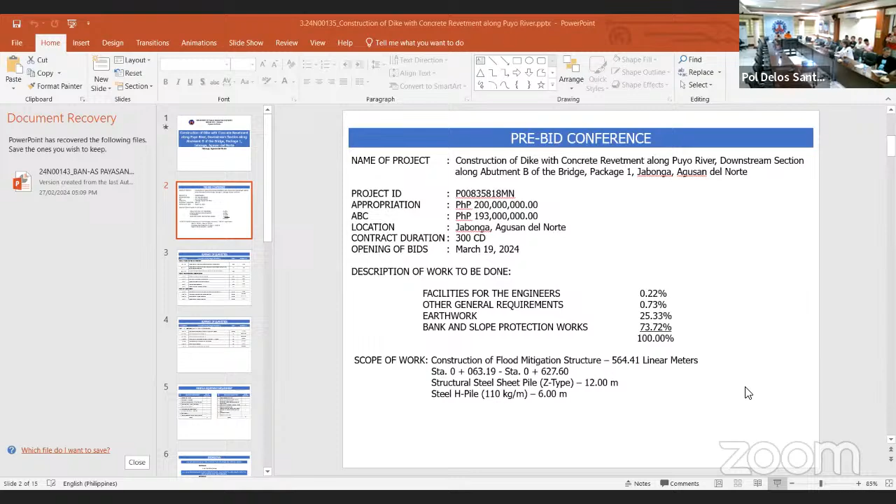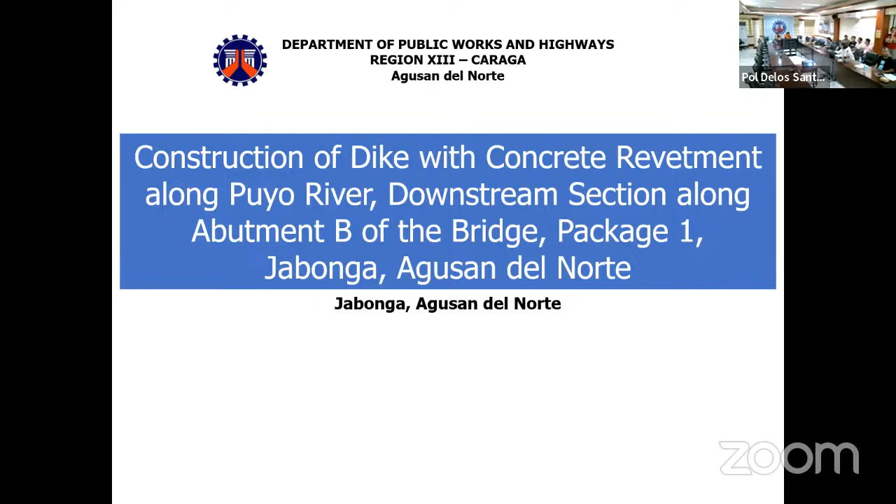So, contract ID 24N00135, construction of dike with concrete revetment along Puyo River, downstream section along abutment B of the bridge, package 1, Jabonga, Agusan del Norte. Project ID P00835818MN, appropriation 200 million, ABC 193 million, location Jabonga, Agusan del Norte, contract duration 300 calendar days, opening of

Bids March 19, 2024. Description of works to be done: facilities for the engineers 0.22%, other general requirements 0.73%, earthworks 25.33%, bank and slope protection work 73.72%, total of 100%. Scope of works: construction of flood mitigation structure with a length of 564.41 linear meters, stationing

Station 0 plus 63.19 to station 0 plus 627.6, structural steel sheet pile Z-type 12 meters, steel H pile 110 kilogram per meter with a length of 6 meters.

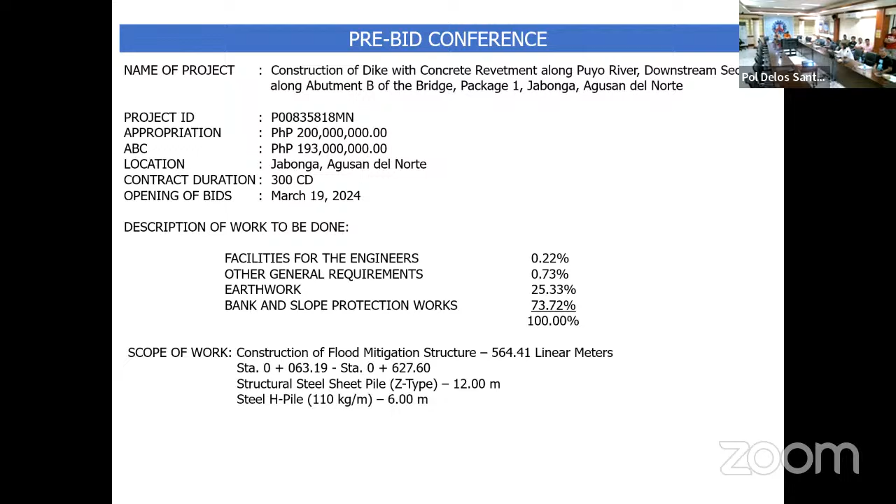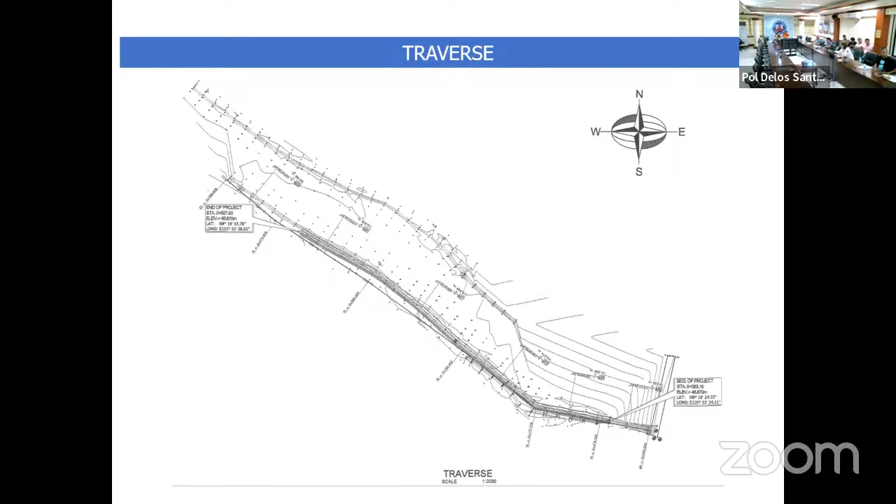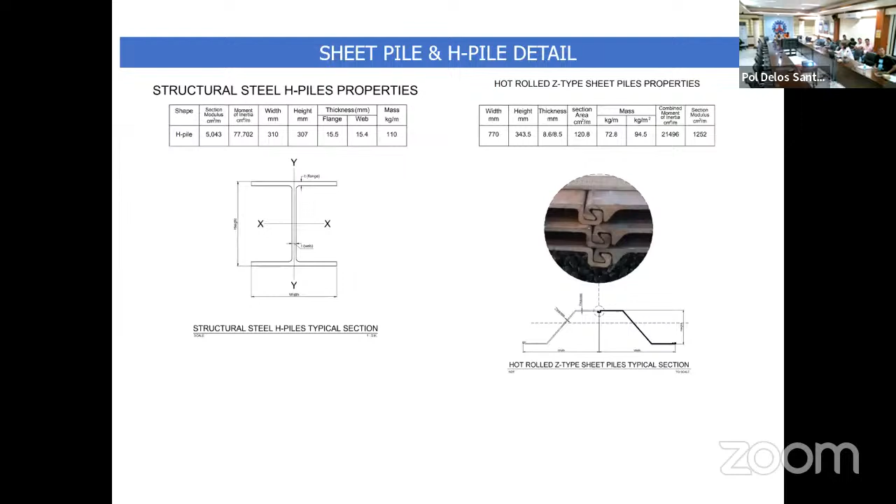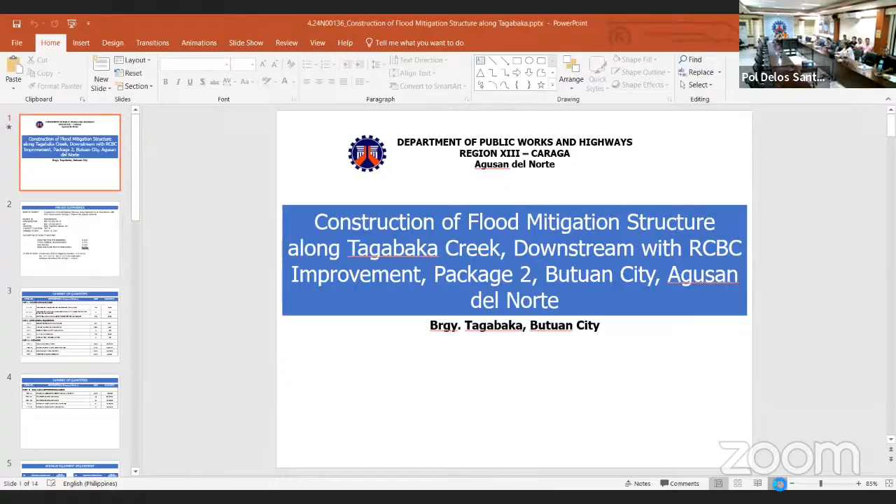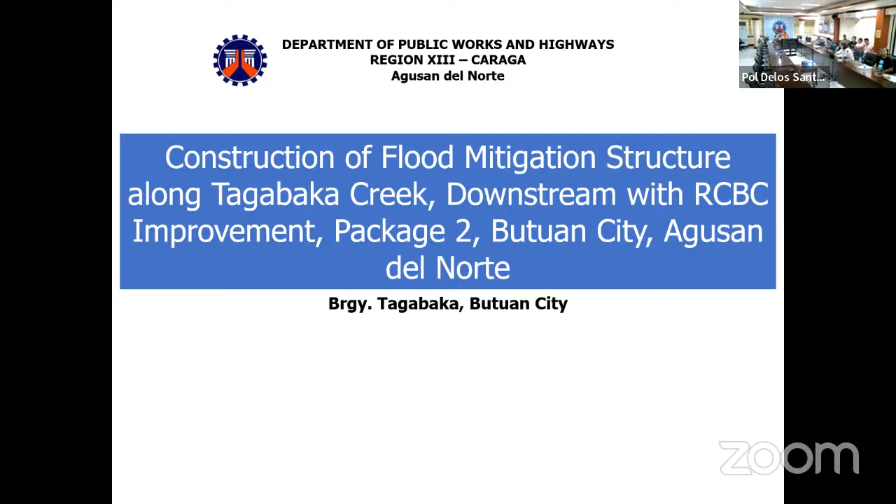For contract ID 24N00136, construction of flood mitigation structure along Tagabaka Creek downstream with RCBC improvement, package 2, Butuan City, Agusan del Norte. Project ID P00835848MN, appropriation 200 million, ABC 193 million, location Barangay Tagabaka, Butuan City, contract duration 300 calendar days, opening of bids

March 19, 2024, description of works to be done, facilities for the engineers 0.22%, other general requirements 0.72%, earthworks 9.16%, bank and slope protection works 89.9%, with a total of 100%.

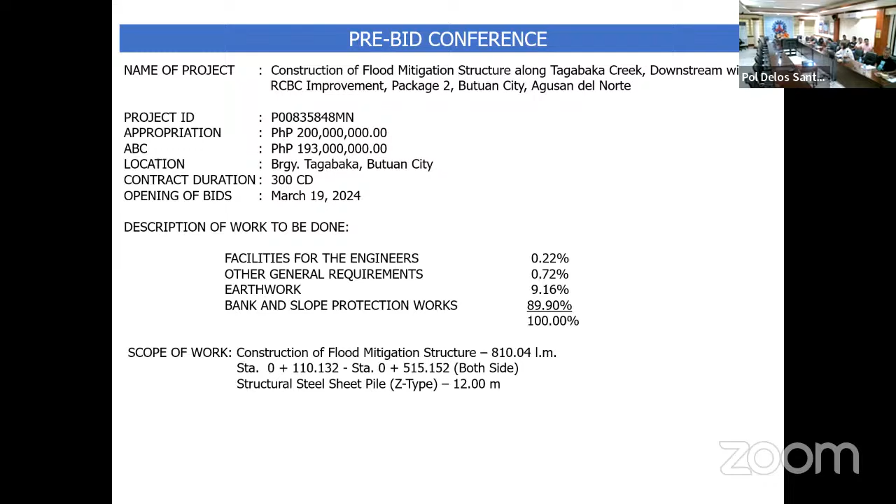Scope of works, construction of flood mitigation structure, length of 810.04 linear meters. Stationing, station 0 plus 110.132 to station 0 plus 515.152, both sides. Structural steel sheet pile Z-type with length of 12 meters.

Summary of quantities for Part A, facilities for the engineers. Part B, other general requirements. Part LA, earthworks. Part LB, bank and slope protection works.

Minimum equipment requirement. For the breakdown of item 8.1.18, item 8.1.111, item 8.1.116, item B.5 and B.72.

For the quarry site, item 104 and 200 at Aupagan Mountain, free haul. Item 200 at Taguibo River with an average hauling distance of 17 kilometers from project site. Item 311 and 405 at Cabadbaran River Dinabucan section, average hauling distance of 36 kilometers from project site.

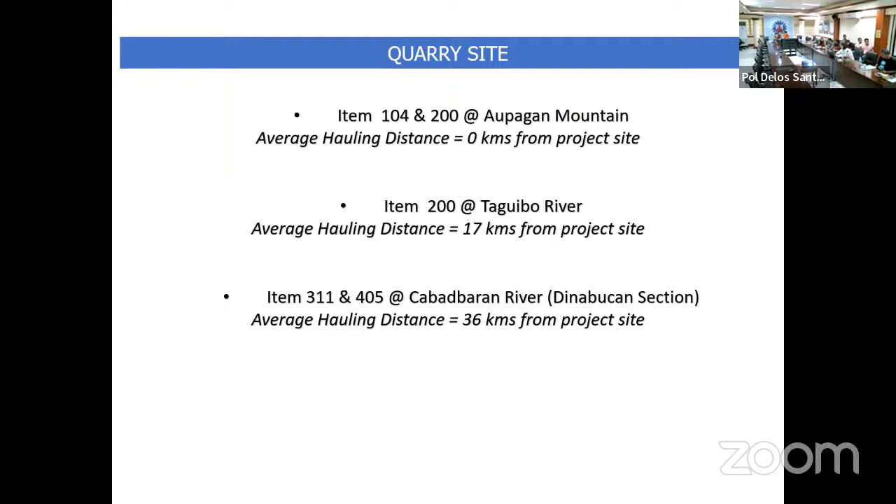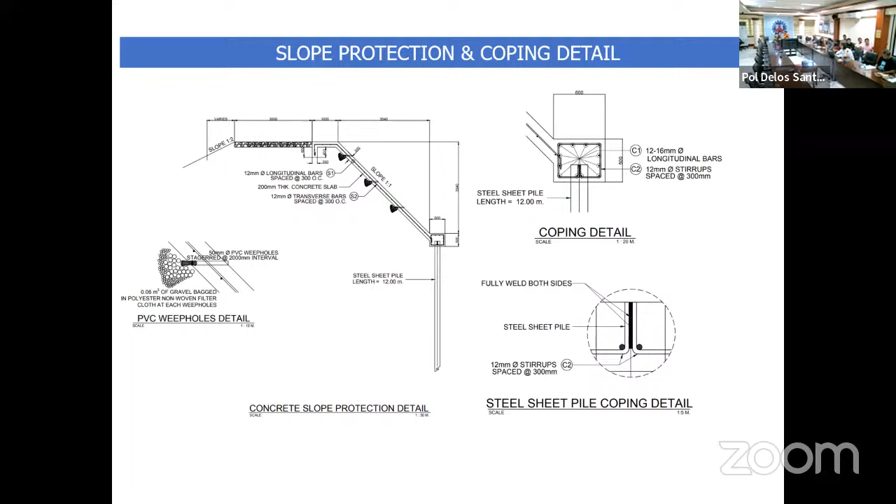For the location map, typical cross-section, slope protection and coping detail, structural steel sheet pile detail. That would be all. Thank you.

Next project with contract ID 24N00137, construction of flood control structure along Cabadbaran River upstream, package 3, Cabadbaran, Agusan del Norte. Project ID P00835844MN. Appropriation 200 million, ABC 193 million.

Location Cabadbaran, Agusan del Norte with contract duration 300 calendar days. Opening of bids March 19, 2024. Description of works to be done: facilities for the engineers 0.22%, other general requirements 0.87%, earthworks 14.33%, and bank and slope protection works 84.58%, total of 100%.

Scope of works: construction of flood mitigation structure with a length of 512 linear meters, stationing from Station 0 plus 412.5 to Station 0 plus 924.5. Structural steel sheet pile Z-type with a length of 18 meters.

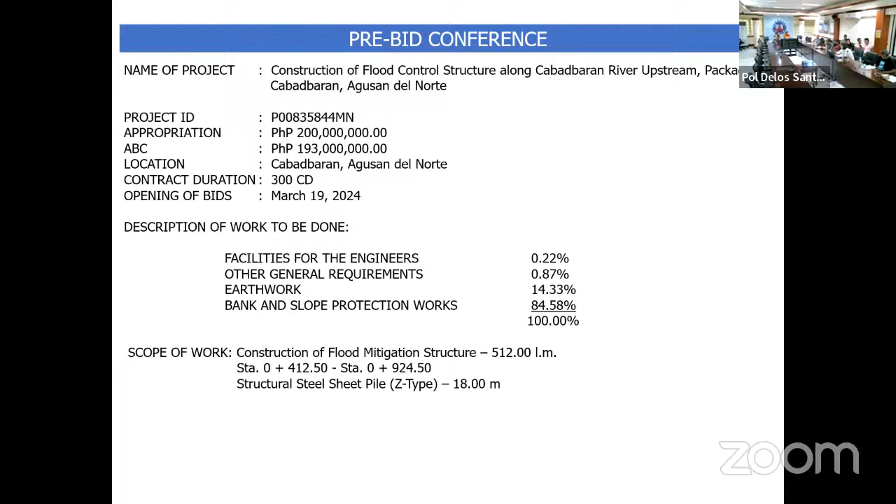Summary of quantities for Part A, facilities for the engineers; Part B, other general requirements; Part LA, earthworks; Part LB, bank and slope protection works. For the minimum equipment requirement, breakdown for item 8.1.18, item 8.1.111, item 8.1.116, item B.5, and item B.72.

Quarry site item 104, 200, 311, and 405 at Cabadbaran River Dinabucan section with an average hauling distance of 10 kilometers from project site.

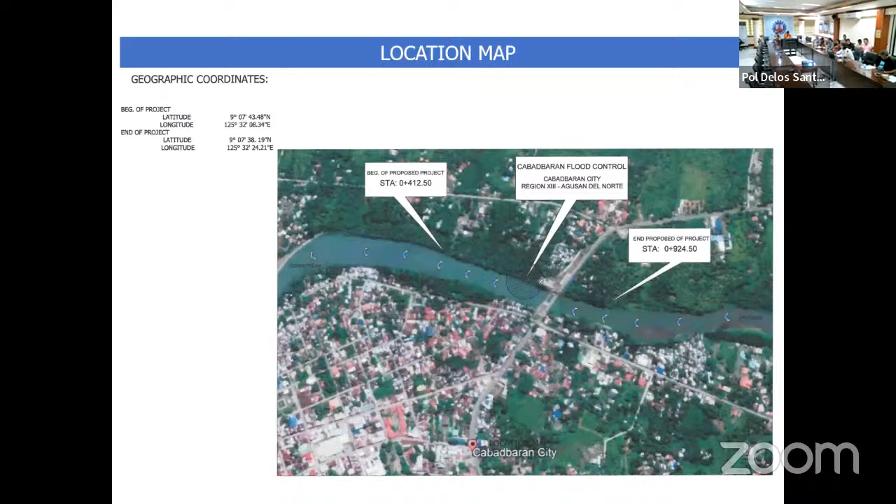Location map. Typical section. Concrete slope protection detail. Coping detail. Structural sheet pile typical section.

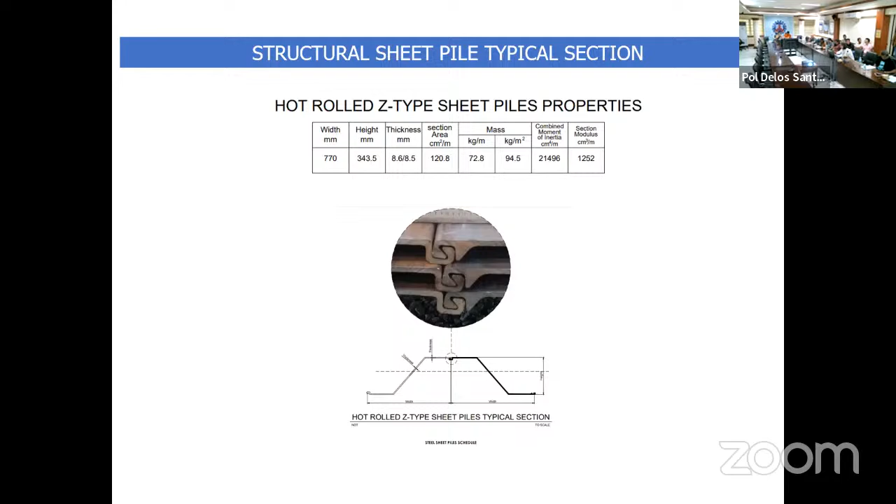That would be all. Thank you.

Further questions and clarifications for the project? I know stuff from the previous. Okay sir, so please proceed to the next, ma'am. Thank you.

Next project with contract ID 24N00138. Construction of flood control structures along Lake Mainit, Tubay River, Kalinawan-Karak-an Section, Package 4, Tubay, Agusan del Norte.

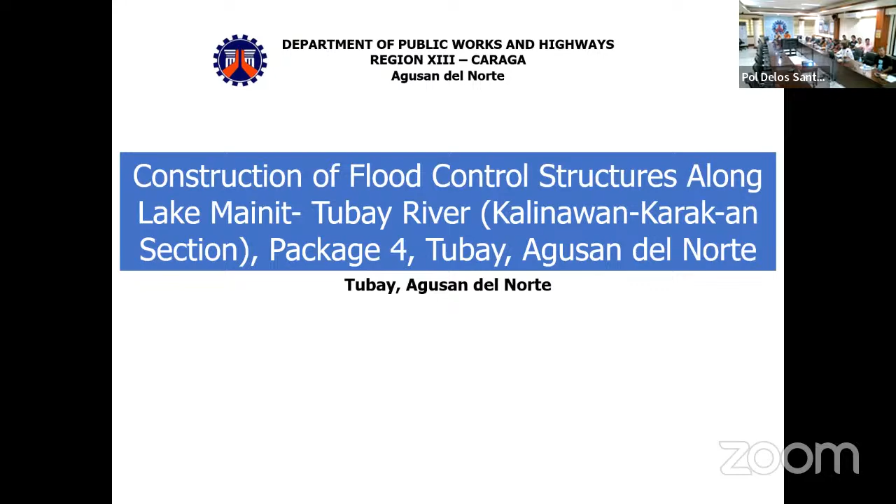Project ID P00820373MN. Appropriation 100 million, ABC 96,500,000. Location Tubay, Agusan del Norte, contract duration 240 calendar days, opening of bids March 19, 2024. Description of works to be done: facilities for the engineers 0.37%, other general requirements 1.2%, earthworks 27.44%, bank and slope protection work 71%, total of 100%.

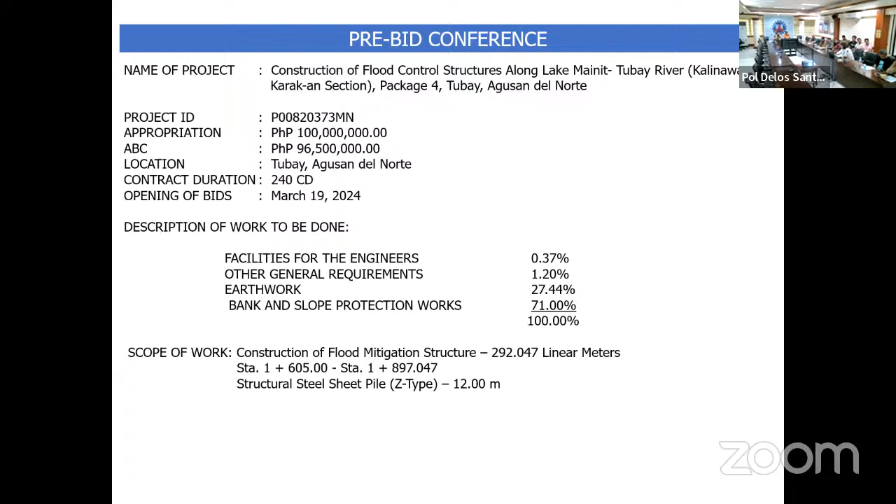Scope of works: construction of flood mitigation structure, length of 292.047 linear meters, stationing Station 1 plus 605 to Station 1 plus 897.047. Structural steel sheet pile Z-type, 12 meters.

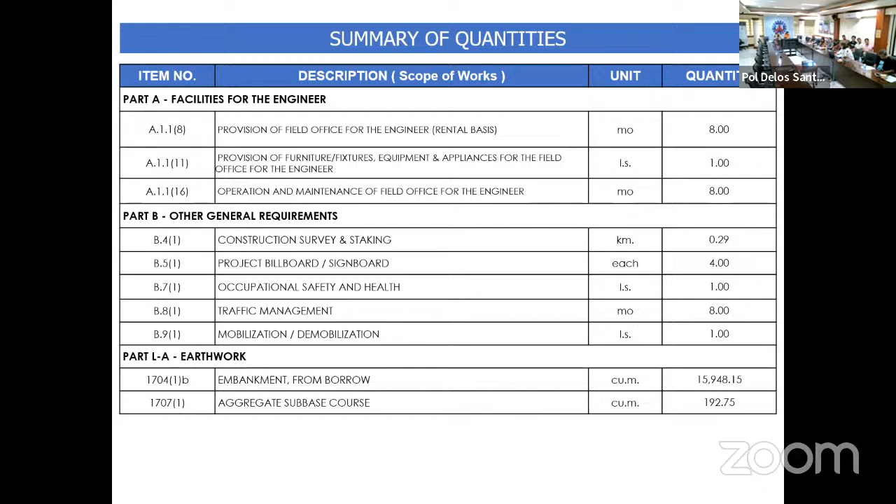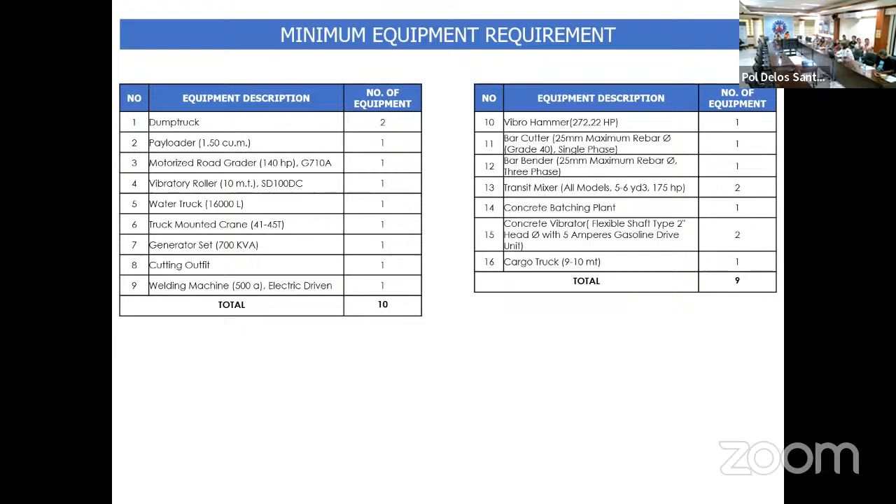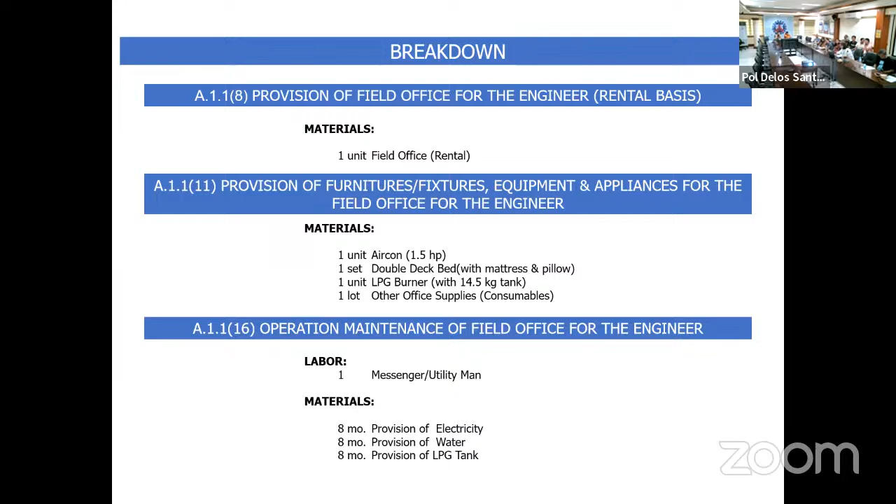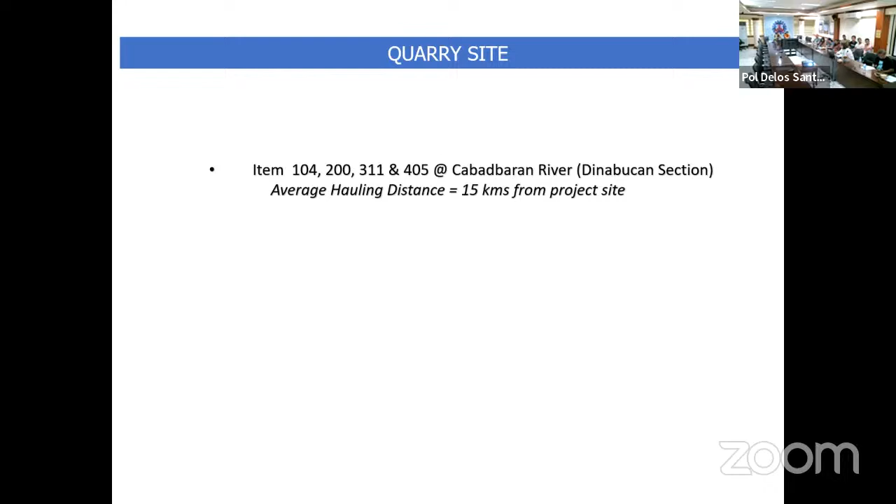Summary of quantities for Part A, facilities for the engineers; Part B, other general requirements; Part LA, earthworks; Part LB, bank and slope protection works. Minimum equipment requirement breakdown for item A.1.1(8), A.1.1(11), A.1.1(16), B.5, and B.72. Quarry site item 104, 200, 311, and 405 at Cabadbaran River, Dinabucan section with an average hauling distance of 15 kilometers from project site.

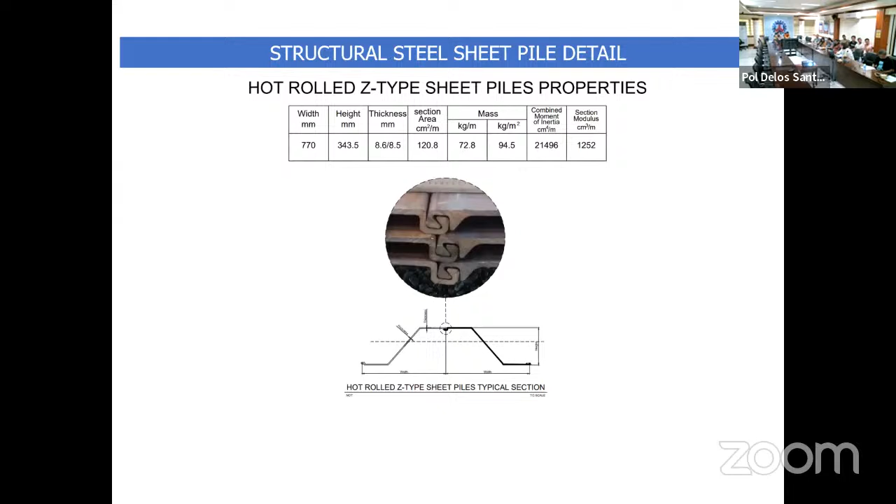For the location plan, typical section, concrete slope protection detail, structural steel sheet pile detail, and for the walkway detail, stair detail.

That would be all. Thank you.

Thank you, ma'am. Comments and clarifications? None? Okay, let's move to the next projects and the next presenter. Thank you, ma'am.

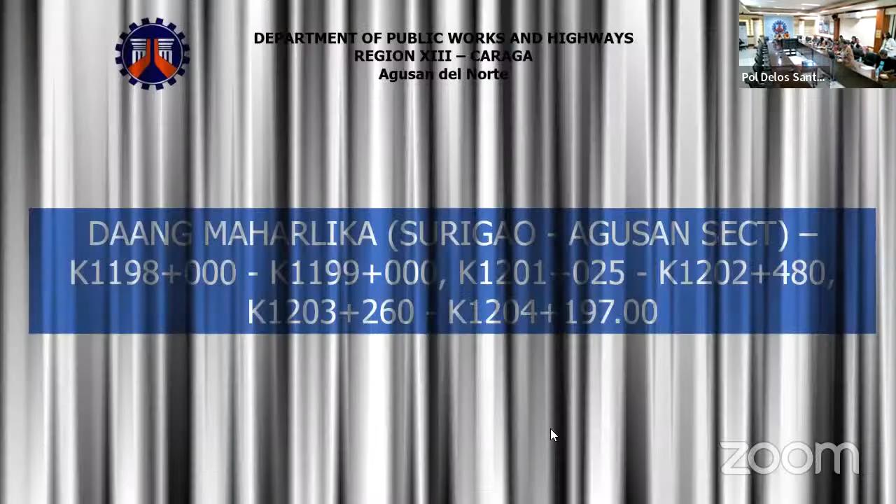Continuation for the next project. The contract ID 24N00023, Daang Maharlika, Surigao, Agusan section. Kilometer 1198 plus 00 to kilometer 1199 plus 00 to kilometer 1201 plus 25 and kilometer 1202 plus 480 and kilometer 1203 plus 260 to kilometer 1204 plus 197.

Project ID P00800162 MN. The appropriation is 210 million, approved budget for the contract is 202,650,000. Right of way of 20 million. Contract duration of 300 calendar days. Location is in Agusan del Norte. Opening of bid is on March 19, 2024 at 10 a.m.

Type of works to be done: facilities for the engineers, other requirements, earthworks, sub-base and base course, surface courses, drainage structures, miscellaneous structures, total of 100%. Scope of works: road widening. Station limit as shown in the slides, project length of 3.392 kilometers.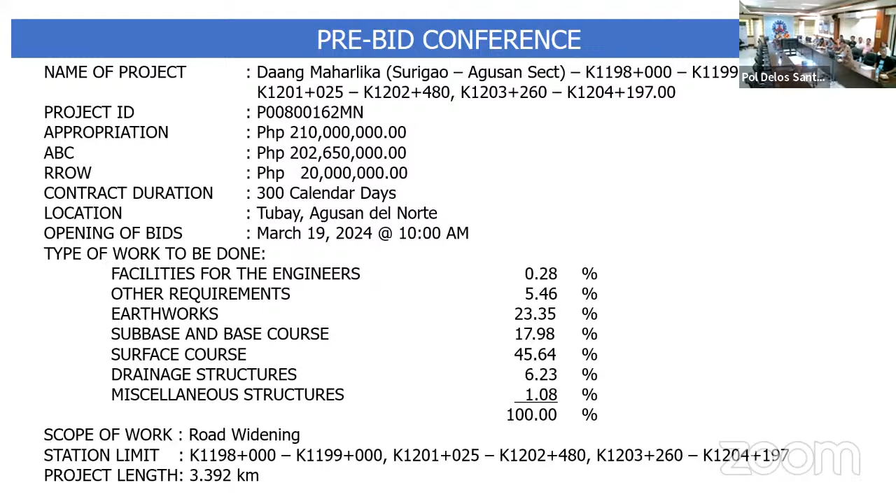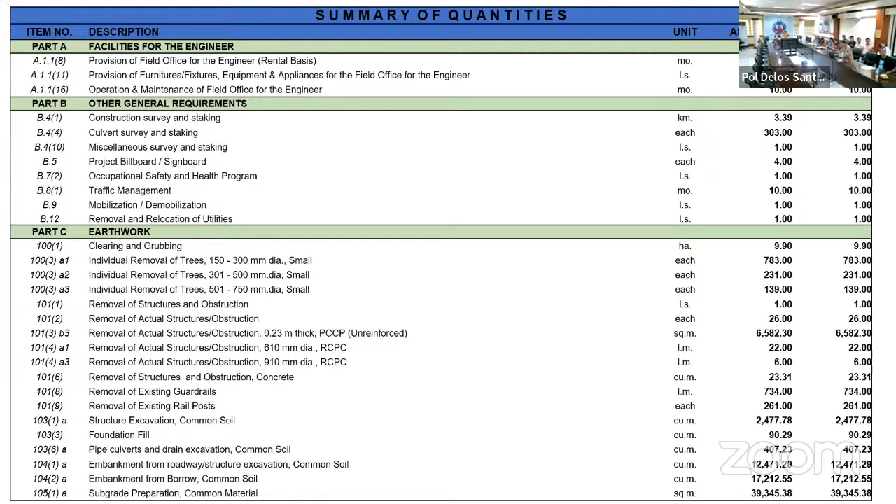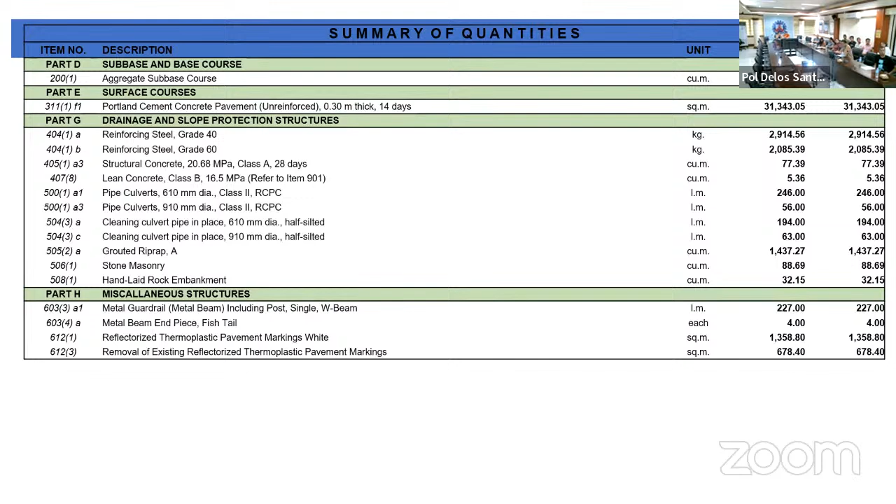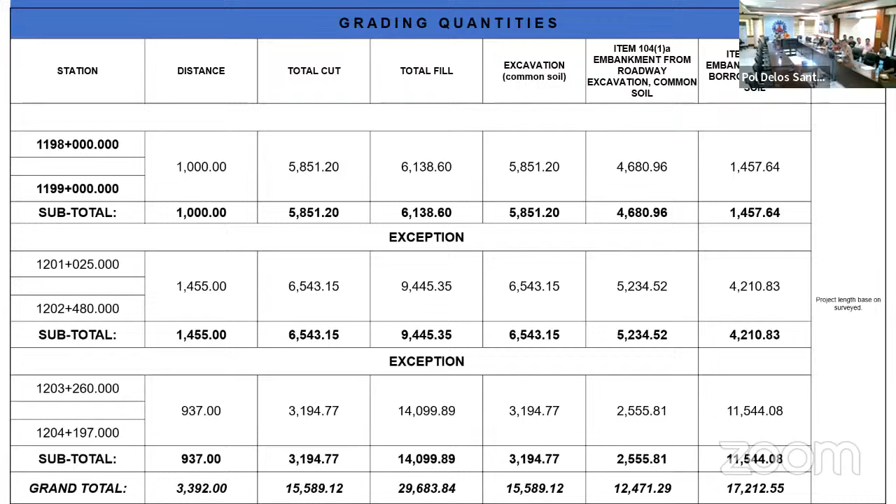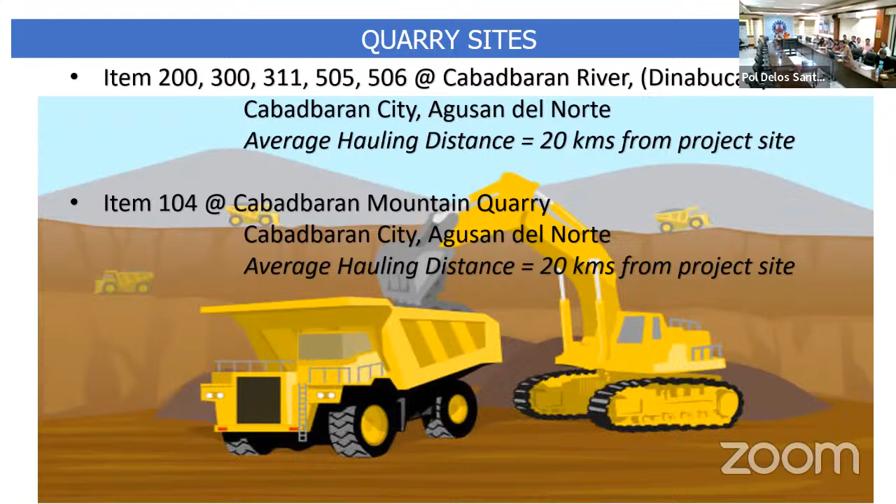For the quarry site of the project, as shown, for item 200, 300, 311, 505, and 506 at Cabadbaran River, Dinabucan section in Cabadbaran City, Agusan del Norte, average hauling distance of 20 kilometers from the project site. Also for item 104 at Cabadbaran Mountain Quarry, Cabadbaran, Agusan del Norte, average hauling distance of 20 kilometers from the project site.

Description of works to be done is the removal of paved shoulder into another lane.

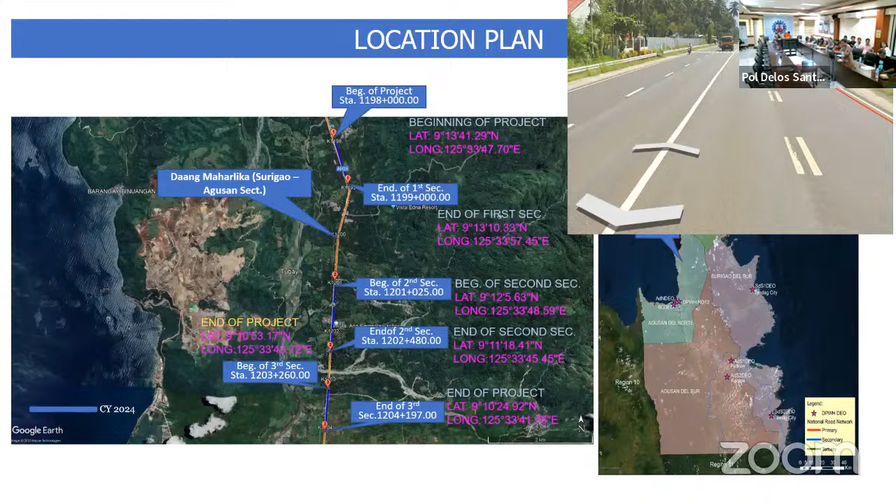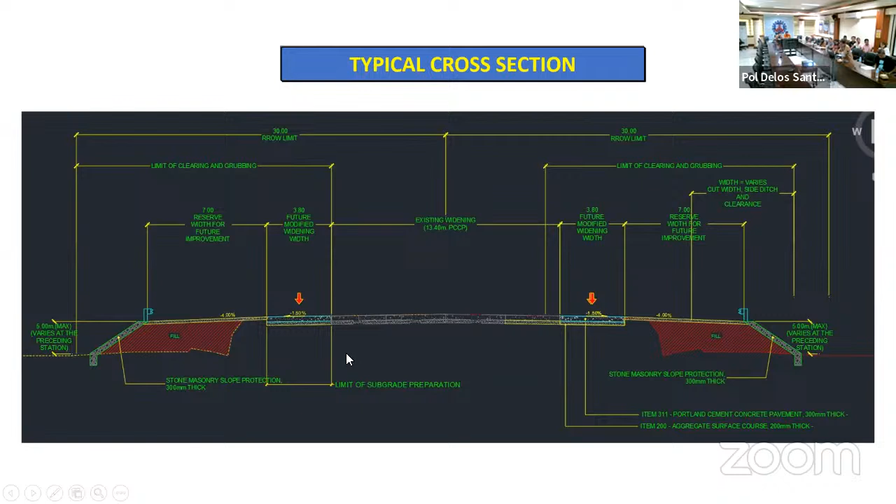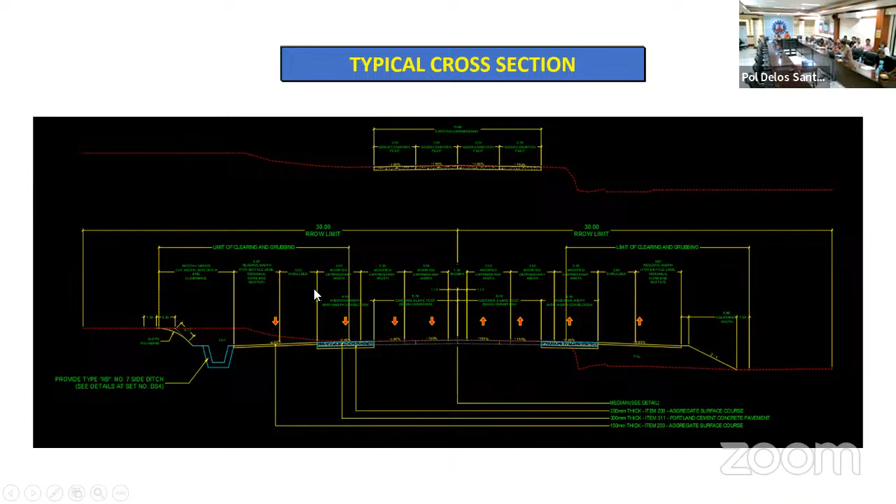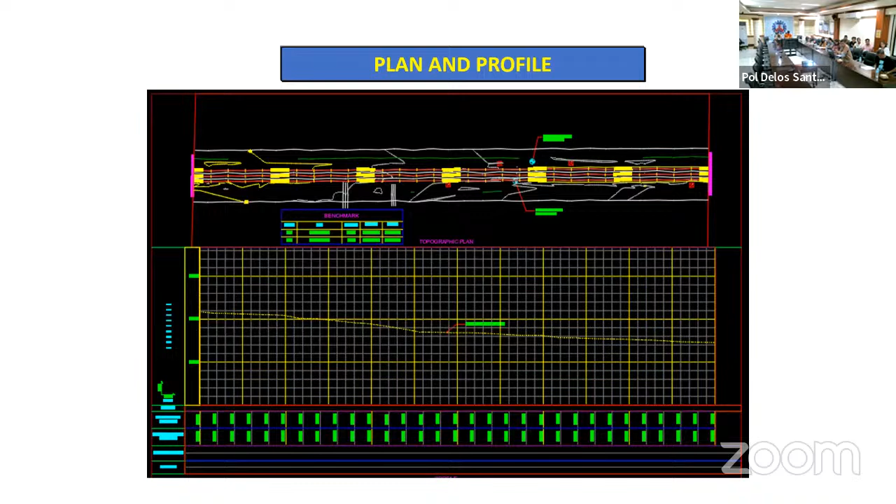For the topographic plan and profile of the project, we follow the existing grade and existing alignment. Continuation for the plan and profile, following the existing gradient of the project.

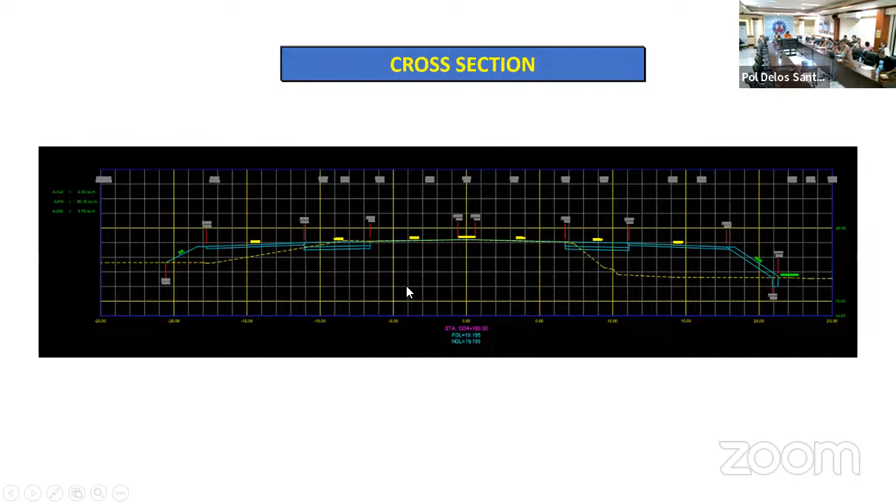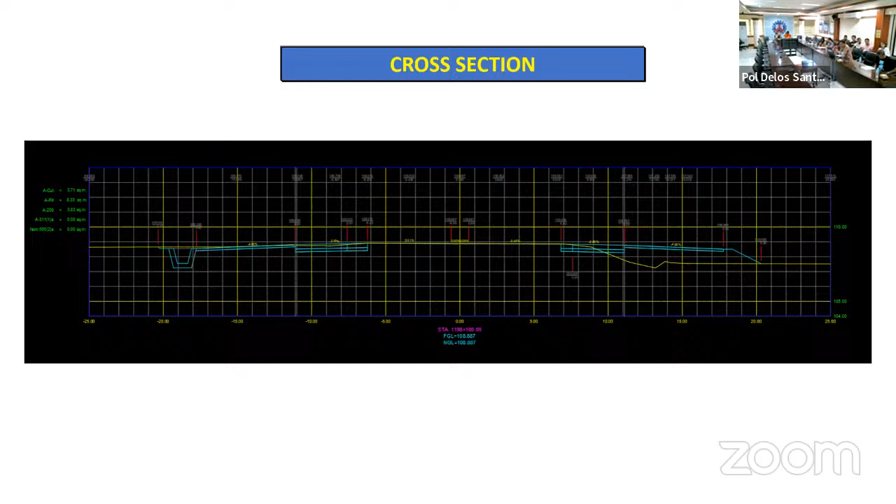For the construction of the project: existing 4 lanes, adding another lane, and providing reservations with embankment materials. Still for the cross sections, add another lane to the left side and another lane to the right side, providing reservation embankment materials and slope protection embankment materials. Continuation for the cross sections with line canal, additional lane on the left and right side, and providing reservation and line canal for the project.

Thank you, sir. My question. Yes sir, go ahead sir.

For the last project, we have contract ID 240004, Rehabilitation, Reconstruction, Upgrading of Damaged Paved Roads along Daang Maharlika, Agusan-Davao section, kilometer 1241 plus negative 321, kilometer 1241 plus 510, and kilometer 1242 plus 25 to kilometer 1243 plus 800.

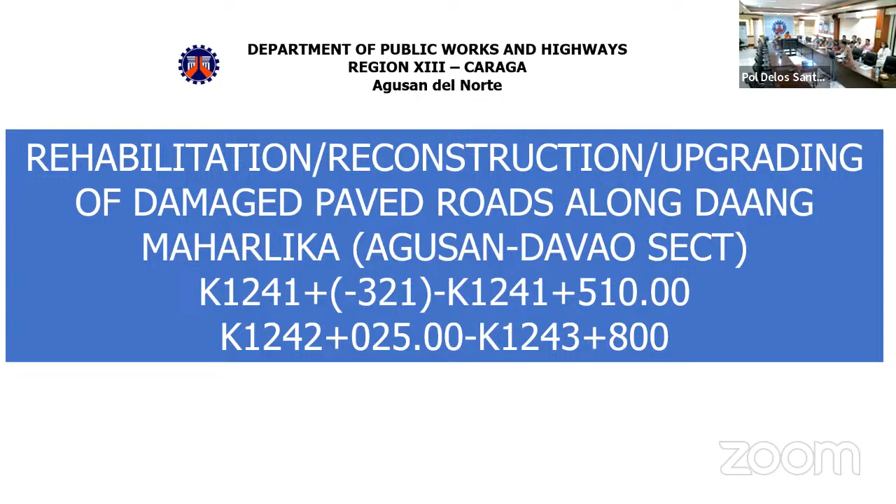Contract ID P00833091MN. The appropriation is 169,541,000 pesos. The approved budget for the contract is 163,607,065 pesos. Component 1 is for the rehabilitation of paved road, and component 2 is for slope protection. Location is in Sibagat, Agusan del Sur. Contract duration is 270 calendar days.

Opening of bid is on March 19, 2024 at 10 a.m. Type of works to be done: facilities for the engineers, other requirements, earthworks, sub-base and base course, surface course, drainage, protection structures, miscellaneous structures, and materials details with a total of 59.18 percent, and component 2 for drainage protection structures with a total of 40.82 percent for the slope protection.

So the scope of works to be done: we have the rehabilitated paved road and the slope protection structures. Project length is 5.216 lane kilometers for the paved road rehabilitation, and 2,160 square meters for the slope protection structure, as shown in the slides.

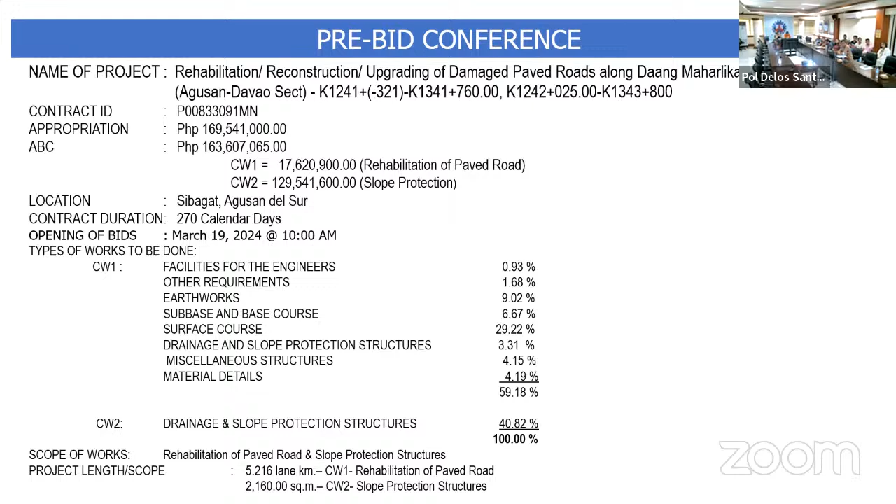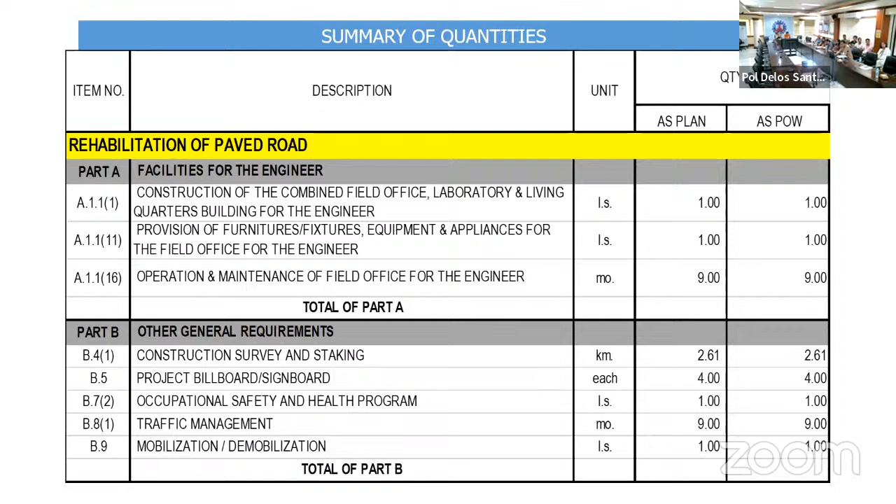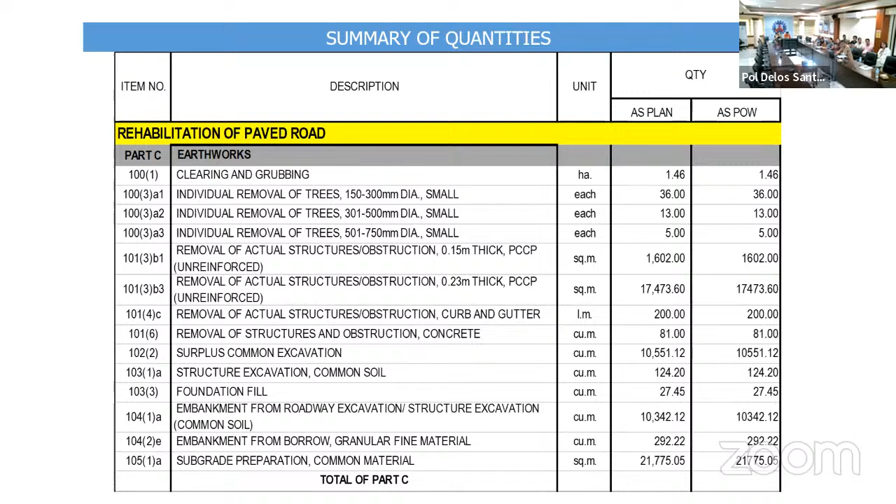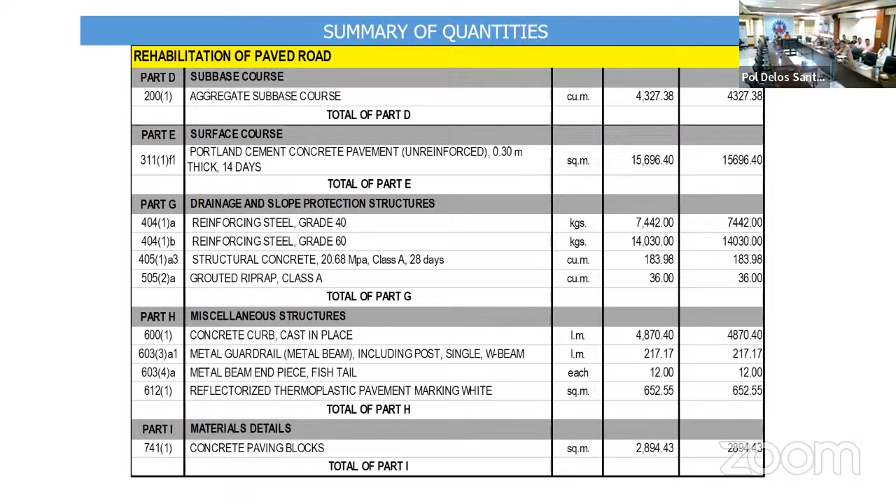We have the summary of quantities for the rehabilitation of paved road, with item description, unit, quantity, as planned and as POW quantities. Part B, other general requirements, continuation for part C with units, quantities, plan and as POW quantities. We have the rehabilitation continuation for the paved road, for part D, part E, part G, part H, and part I. For the slope protection, as shown in the slides, part G covers drainage slope protection structures for component 2.

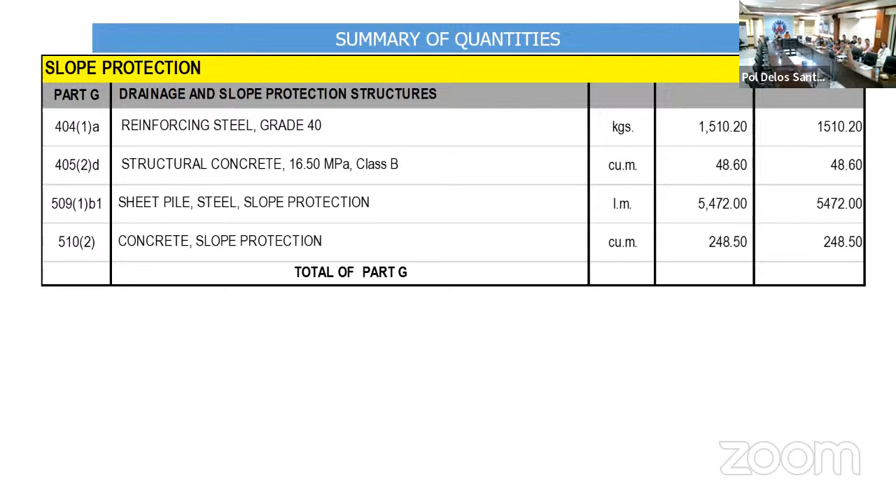So the minimum requirements for the project are shown in the slides. We have the facility for the engineers, A.1.1(1), A.1.1(11), until we consider the office supplies as consumables. Then A.1.1(16).

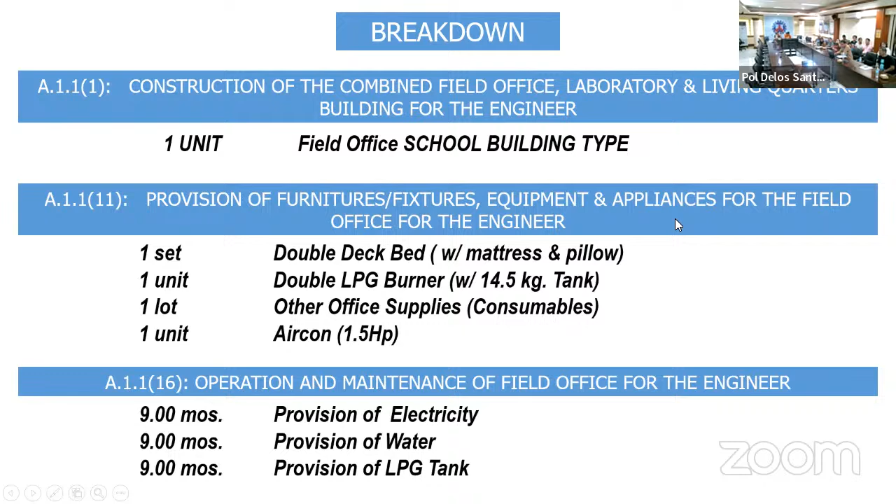Continuation for the project billboard, 4-unit project billboard. Then occupational safety and health program, traffic management, and the quarry side of the project. As shown in the slides: sand and gravel, boulders, with their corresponding hauling distance.

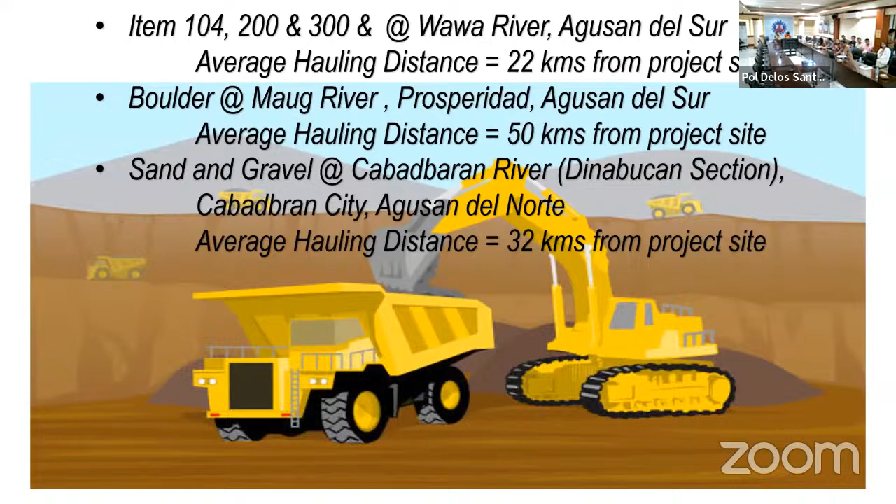This is the location plan of the project for section 1, showing the rehabilitation of the project for the inner lane. And then section 2 of the project, as shown on the right side, with its corresponding geographic coordinates for the beginning and stationing of the project.

So this is the location for section 1 and section 2. For section 1, this is the rehabilitation of the inner lane of the project. And for section 2, this is the project location, also rehabilitation of the inner lane.

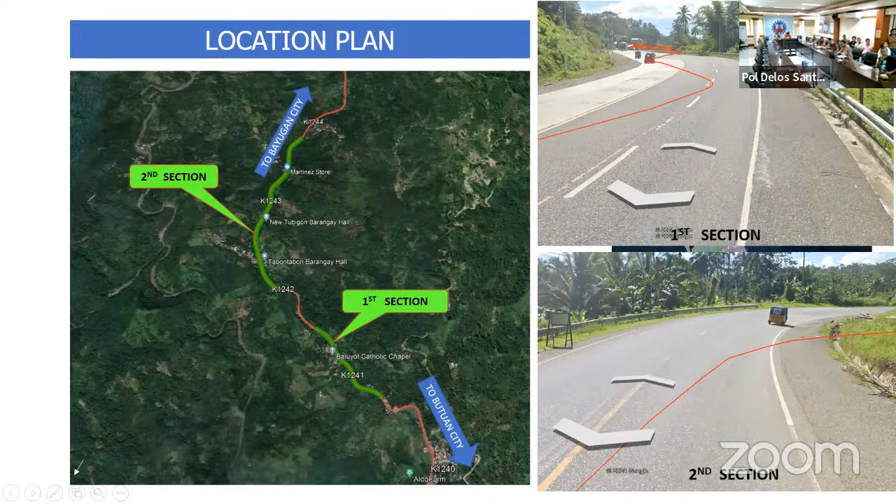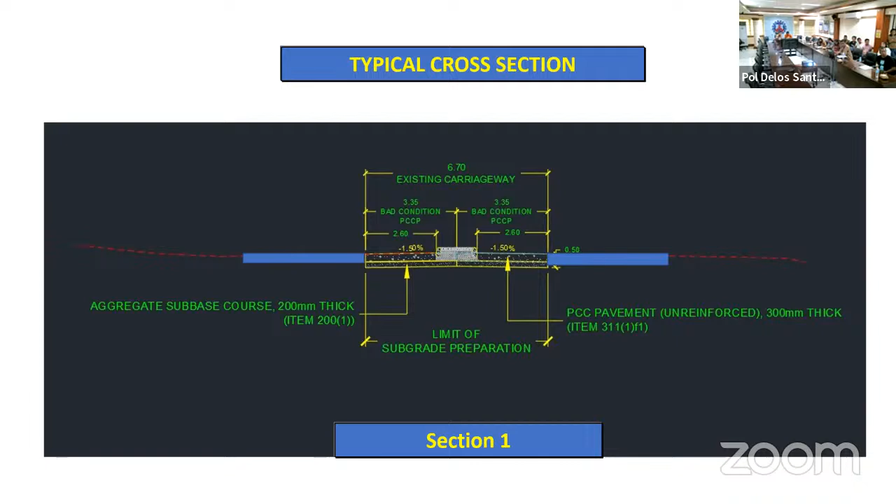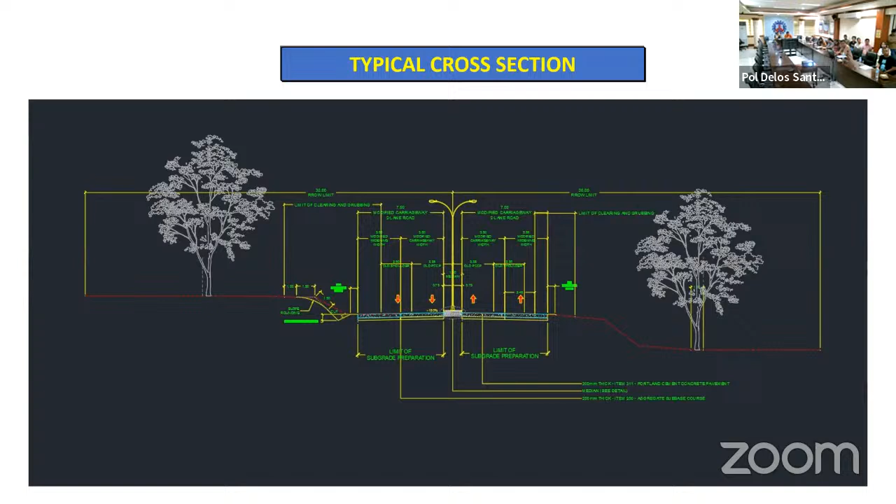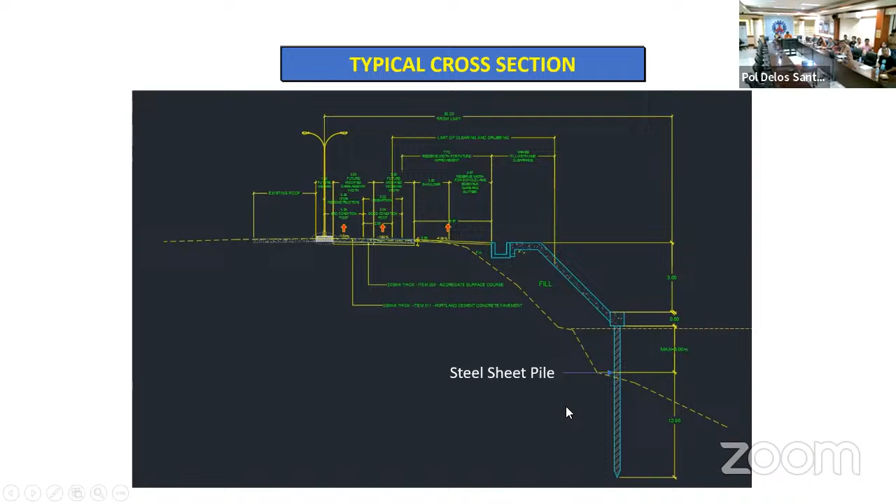So for the typical cross section for slope protections, we are going to provide another lane for the project and then provide the slope protections with the steel sheet piles. That's all, sir.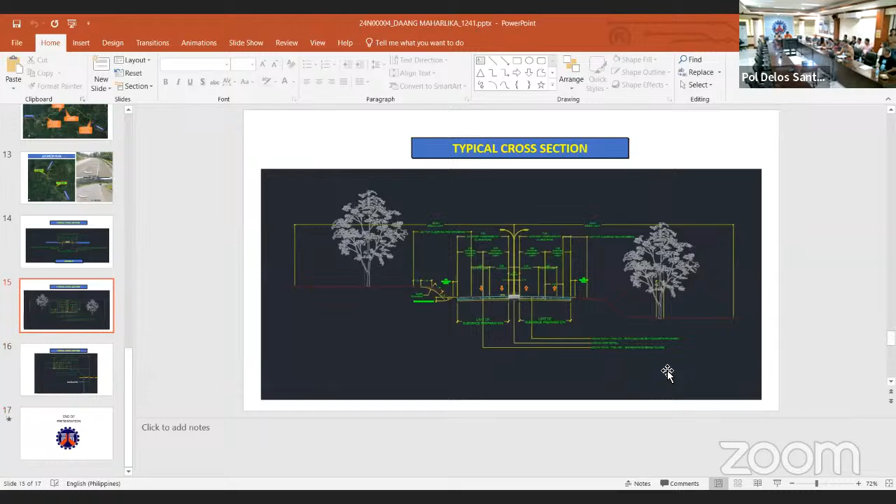Thank you, sir. Are there clarifications for this project or questions? Attorney.

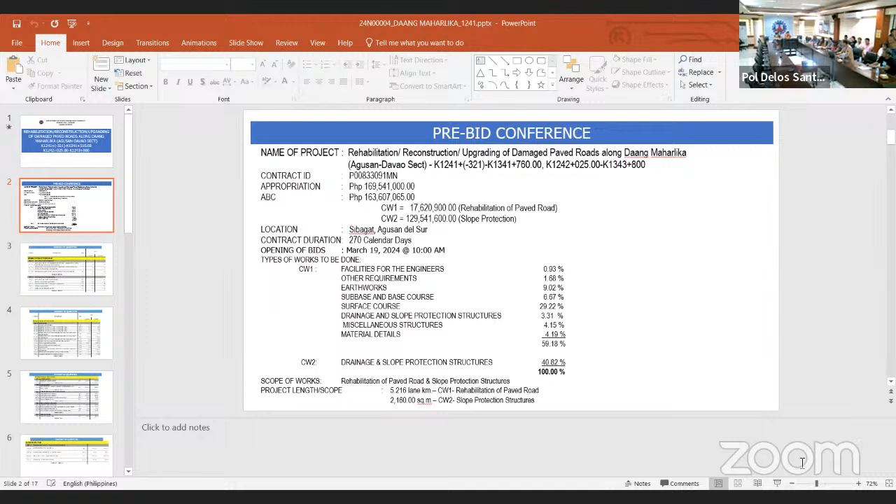Okay, sir. Let's proceed with the presentation of the contract requirements. Sir Saldi, please.

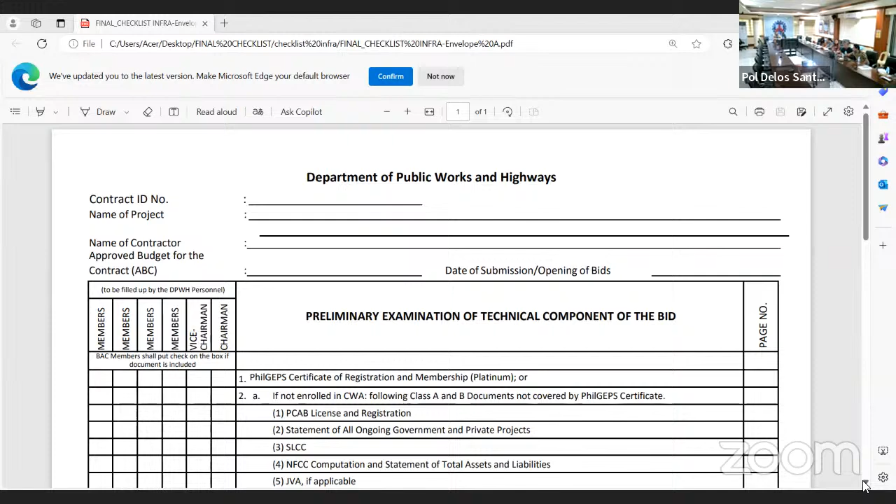And if you are enrolled in CWA, a Class A and Class B document, and CWA should be updated. For the bid security requirement, the following are the acceptable forms. It can be a cashier's check or manager's check issued by a Universal or commercial bank for not less than 2% of ABC. Or it can be a bank draft, bank guarantee, or an irrevocable letter of credit issued by a Universal or commercial bank for not less than 2% of ABC.

Or it can be a surety bond callable upon demand, issued by a surety or insurance company duly certified by the Insurance Commission as authorized to issue such security, for not less than 5% of ABC. Or it can be a bid securing declaration.

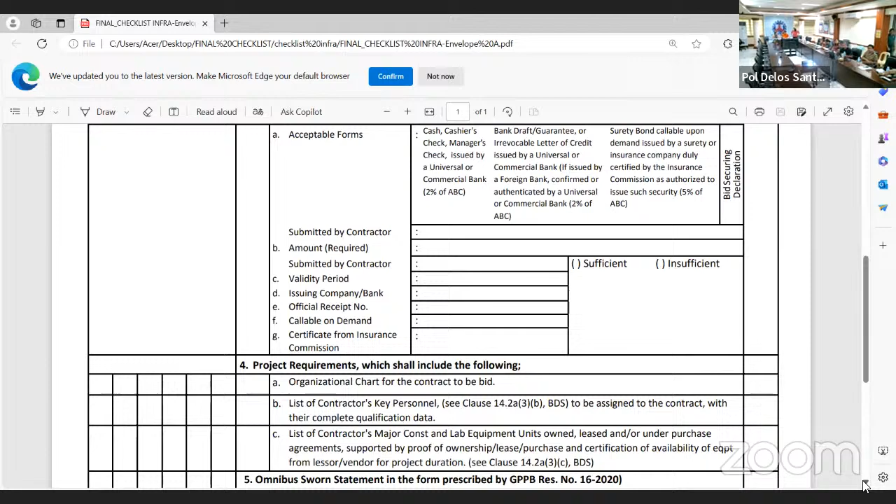For the project requirement, it shall include the following. Letter A is the organizational chart for the contract to be bid. Letter B is a list of the contractor's key personnel, as per clause 14.2A sub 3 sub B of the bid data sheet, to be assigned to the contract with their complete qualification data.

Letter C is a list of the contractor's major construction and laboratory equipment units, either owned, leased, and/or under purchase agreement, supported by proof of ownership, lease contract, purchase, and certification of availability of equipment from the lessor or vendor for the project duration, as per clause 14.2 sub A sub 3 sub C of the bid data sheet.

And number 5 is the omnibus sworn statement in the form prescribed by GPPB Resolution Number 16-2020. Any missing, incomplete, or patently insufficient document in the above-mentioned checklist is a ground for outright rejection of the bid.

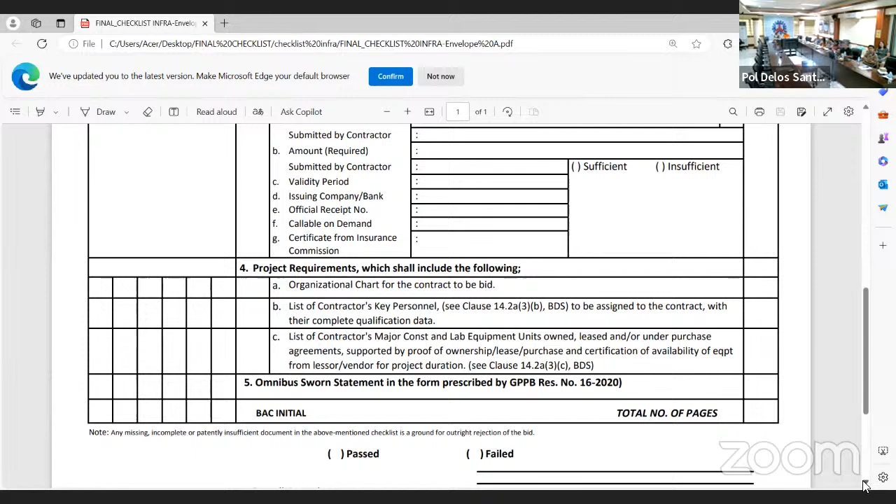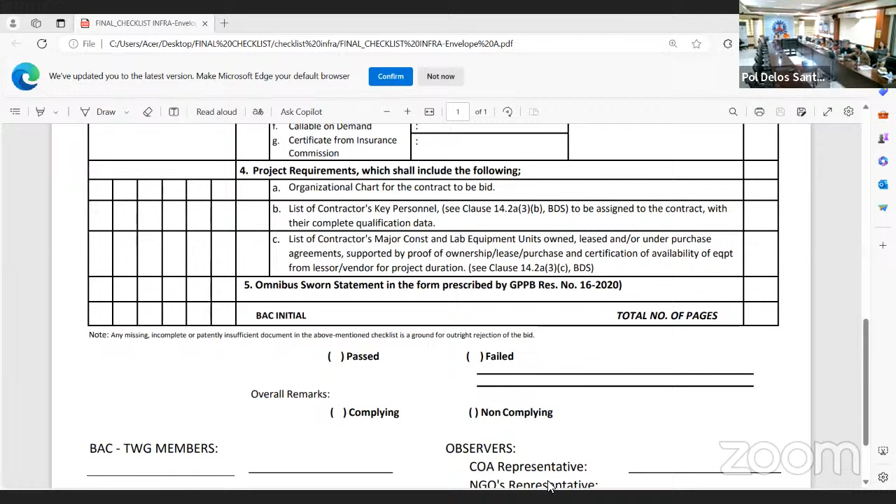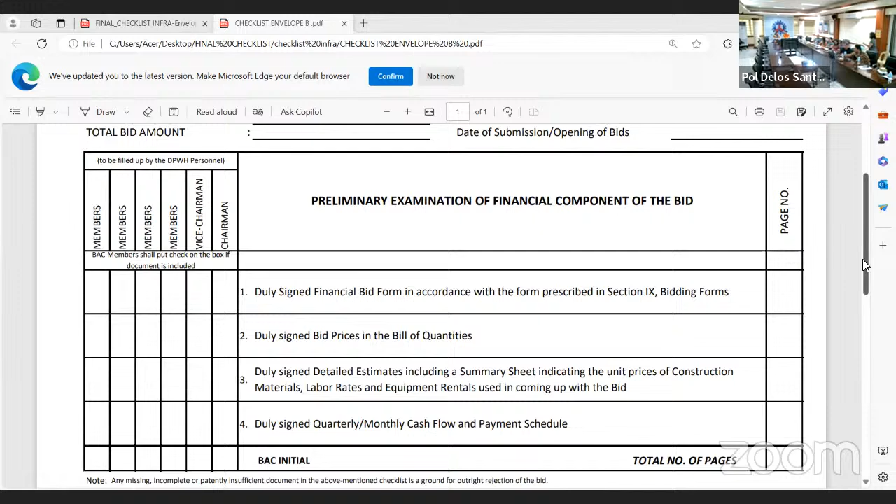For the financial component of your bid, the following are the requirements.

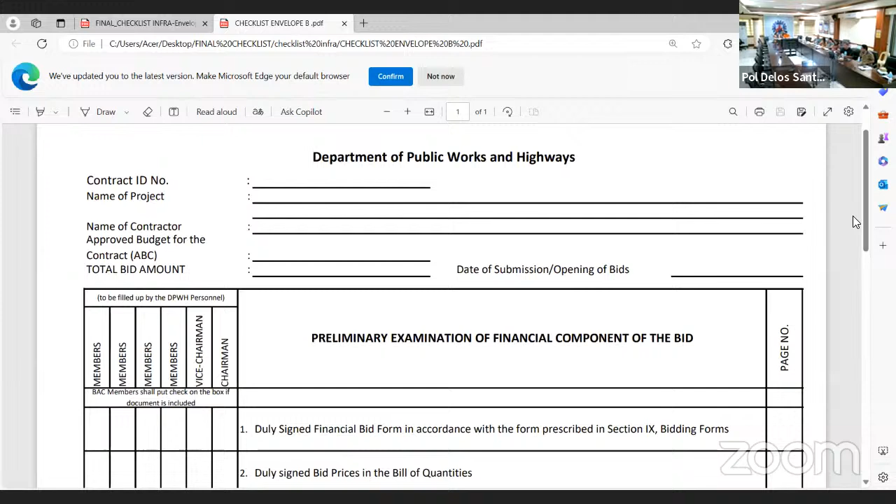Number 1 is a duly signed financial bid form in accordance with the form prescribed in Section 9 of the bidding forms. Number 2 is duly signed bid prices in the bill of quantities. Number 3 is duly signed detailed estimates, including a summary sheet indicating the unit prices of construction materials, labor rates, and equipment rentals used in coming up with the bid.

And number 4 is a duly signed quarterly or monthly cash flow and payment schedule. Again, any missing, incomplete, or patently insufficient document in the above-mentioned checklist is a ground for outright rejection of your bid. That's all, sir. Thank you, sir.

Are there any other matters at hand? No more?